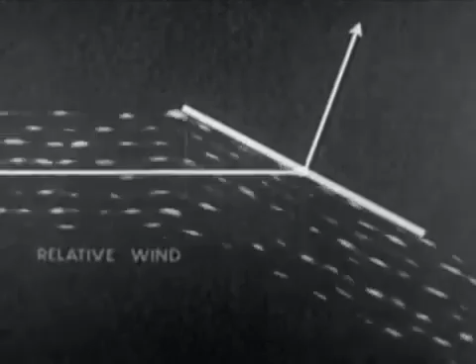An air stream flowing past a flat plate exerts upon it a force whose direction depends upon the angle between the plane of the plate and the direction of airflow. This force may be analyzed into component forces, which are called lift and drag.

Lift acts at right angles to the relative wind, and drag acts parallel to the relative wind. If the plate is held in a horizontal airstream in this manner, lift is opposed by the weight of the plate, and drag is opposed by the tension on the cord.

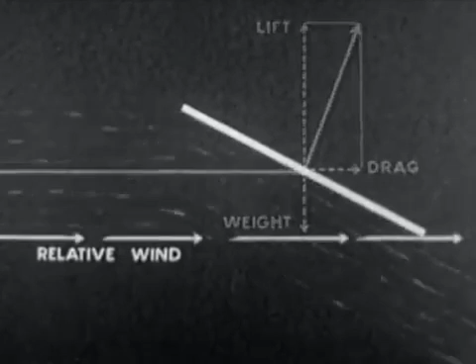The acute angle between the relative wind and the face of the plate is called the angle of attack. This angle may have any value from 0 to 90 degrees. It may be either positive or negative.

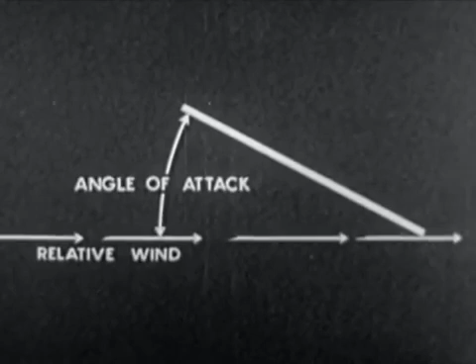An airfoil is any surface designed to be projected through the air in order to produce a useful dynamic reaction. Airfoils which have been studied and used vary widely in form. This is probably the most common type of airfoil section.

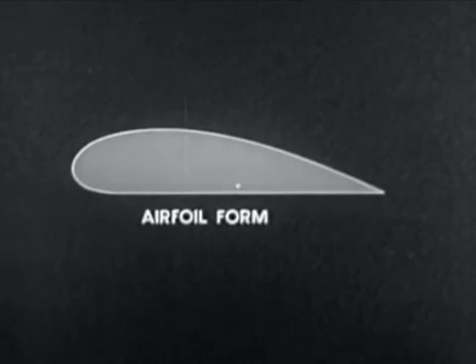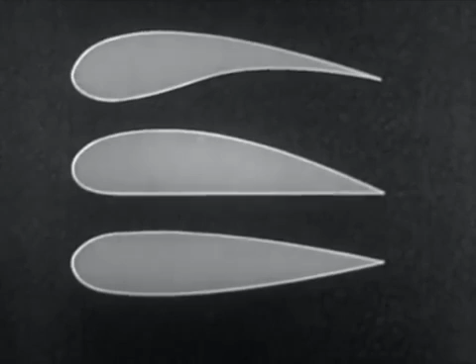Others are convex on their upper surface and concave on the lower, while still others are convex on both surfaces. Relative thickness and curvature of airfoils vary considerably.

In general, a line through an airfoil's leading and trailing edges is known as its chord. This is the case with an airfoil having a symmetrical double convex camber.

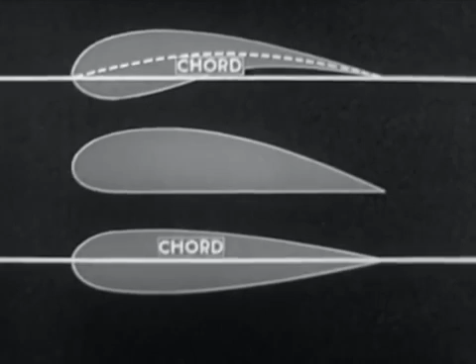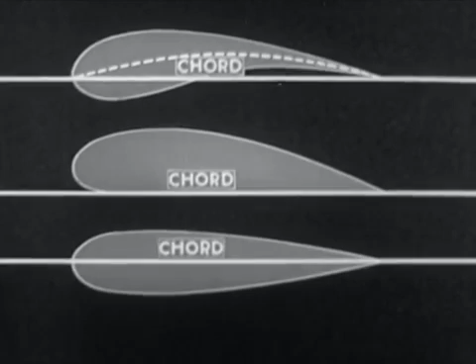In an airfoil which is convex on its upper surface and concave below, the chord corresponds to the chord of the median camber. In other airfoils, it is the line of a straight edge brought into contact with the lower surface at 2 points.

The acute angle between the chord of an airfoil and the relative wind is known as the angle of attack of the airfoil.

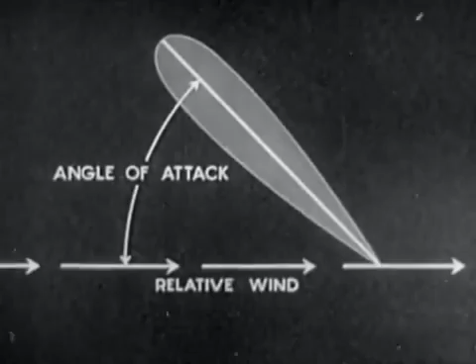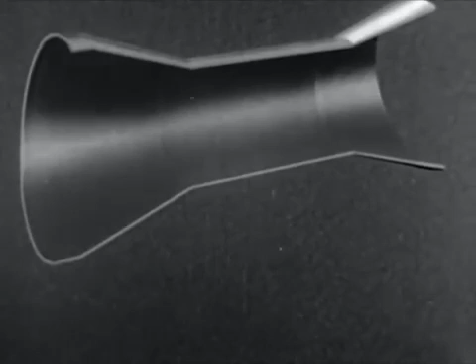A wind tunnel is a device for testing reactions on airfoils and other aerodynamic shapes. It usually consists of a large tube with a constricted throat. A propeller produces airflow, and a honeycomb arrangement is placed at one end to ensure straight airflow.

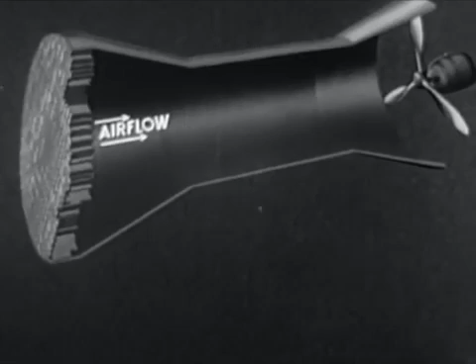When lift and drag of an airfoil are to be measured, the model is placed in the chamber and supported by wires. One wire runs from the model through the top of the tunnel to a balance arm which is weighted so as to maintain tension and compensate for other forces.

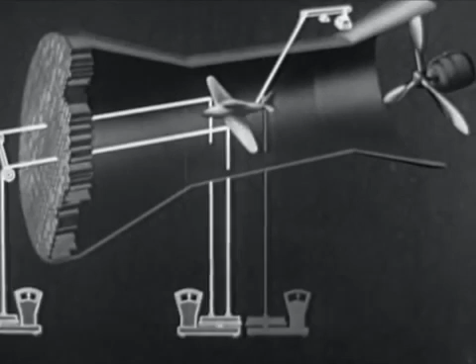From the leading edge of each wing, a wire runs forward in the direction of flight, over pulleys, and down to a bar on a platform type of scale. A second pair of wires runs vertically downward from the wings to another scale. Finally, a wire extends from the tail down to a third scale. In this way, the model is suspended so that the various forces exerted upon it may be measured.

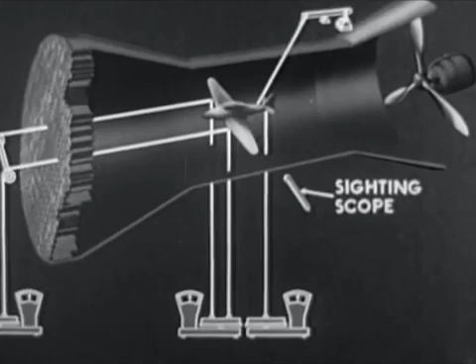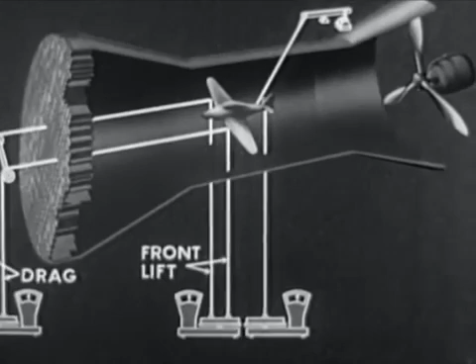The position of the model is observed through sighting scopes. With the air flowing at the desired velocity, drag force is exerted upon these wires. Front lift is measured as the actual lifting force upon these wires. Rear lift as the force upon this wire. Total lift is the sum of front and rear lift.

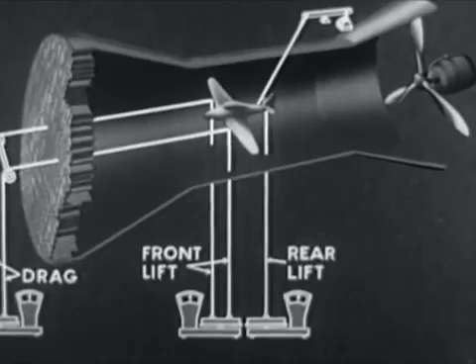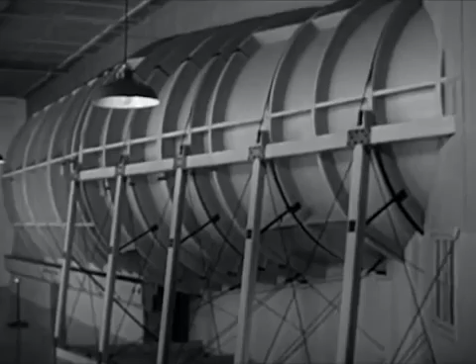Four electric motors of 400 horsepower each furnish power to turn the fan. Two of the motors are shown here. There are two others inside the tunnel.

The fans are 12 feet in diameter and have 12 blades. When driven at a speed of 700 RPM, they produce an airspeed of approximately 200 miles an hour in the tunnel.

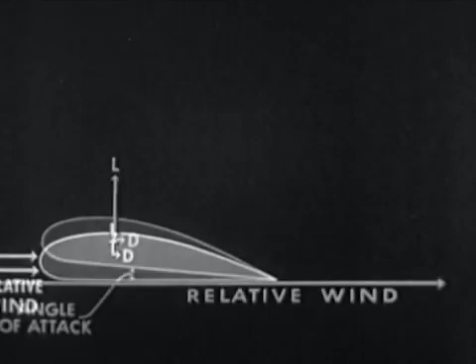Wind tunnel tests show how lift and drag vary with the angle of attack of an airfoil. In general, as the angle of attack increases, lift and drag increase up to a point where lift decreases abruptly and drag becomes the principal component.

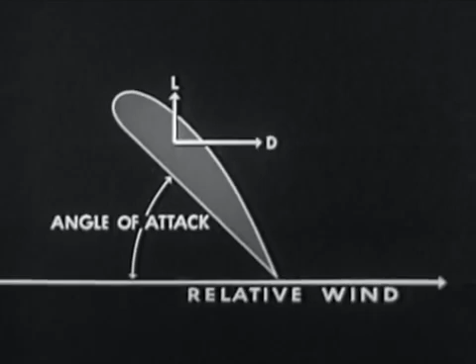This is known as the stalling angle. From this angle to 90 degrees, drag continues to increase while lift falls off.

At 90 degrees, the airfoil acts like a flat plate. It has maximum drag and negligible lift.

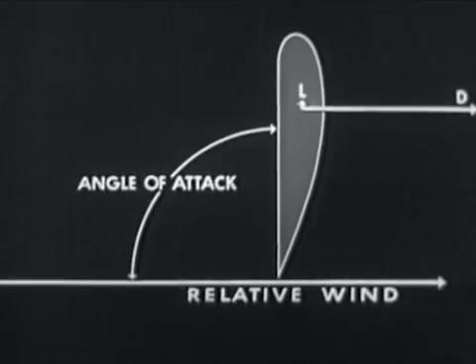Wind tunnel tests have also proven that for any given airfoil, lift and drag vary directly with the area of the wing. If the area is doubled, lift and drag are also doubled.

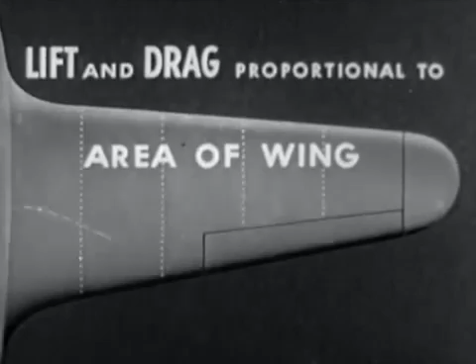Lift and drag vary directly as the square of the velocity of the relative wind. If wind velocity is doubled, lift and drag are multiplied by 4.

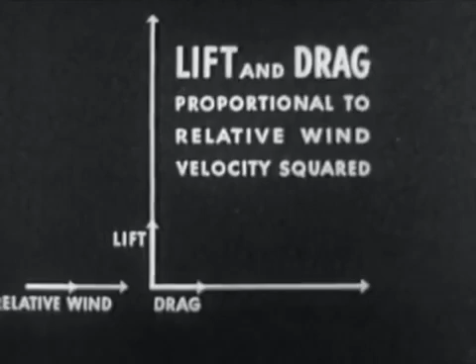Lift and drag are directly proportional to the density of the air passing over the airfoil. If air density is doubled, lift and drag are also doubled in value.

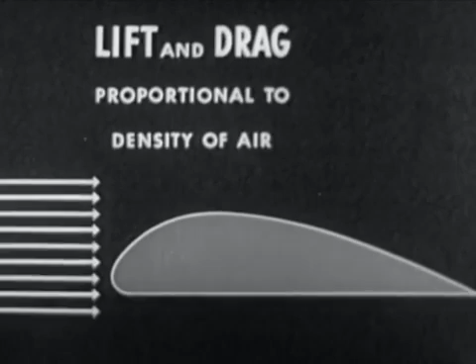Expressed as an equation, the lift is equal to a coefficient which is determined by the angle of attack and shape of the airfoil, multiplied by the density of the air, multiplied by the area of the wing, multiplied by the velocity of the wind squared.

Drag equals the coefficient, which is determined by the angle of attack and shape of the airfoil, multiplied by the density of the air, multiplied by the area of the wing, multiplied by the velocity of the wind squared.

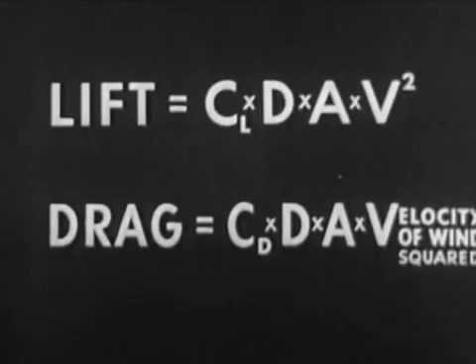When an airplane is flying horizontally at a constant velocity, the forces acting upon it are in equilibrium. The retarding force, or drag, equals the propelling force, or thrust. The lift must equal the total weight of the airplane.

Therefore, the lift and drag equations serve to determine how much weight an airfoil will lift under certain conditions and how much thrust horsepower is required to overcome the total drag of the airplane.

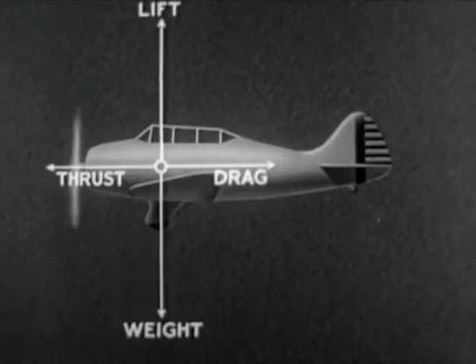The air pressure at various points on an airfoil is measured in order to determine the airfoil's efficiency or its suitability for a given purpose.

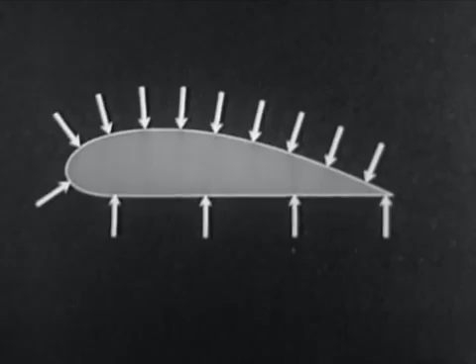The measurements are made by building into a model airfoil small copper tubes which are sealed flush with the surface of the model.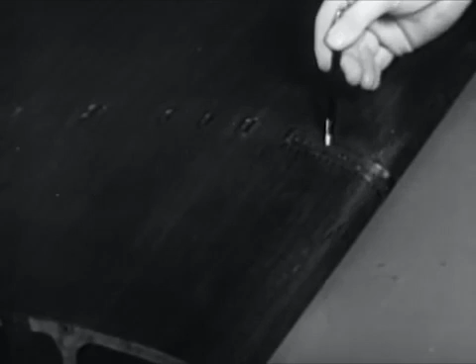These tubes extend from the model to a pressure measuring device outside the tunnel. The device is called a manometer. This figure illustrates its principle of operation.

The liquid in both the tube and the reservoir will be at the same level as long as the pressure in both tube and reservoir are equal.

If by any means, such as this plunger, for example, the pressure in the tube is increased, the liquid is forced into the reservoir, lowering the level in the tube.

If pressure in the tube is decreased, the liquid rises above the level of the reservoir.

In a device such as this, if the liquid in the tube is subjected to varying pressures, the level will rise above or fall below the level of the liquid in the reservoir as the pressure is decreased or increased. Reading of liquid levels provides an accurate means of determining pressure difference.

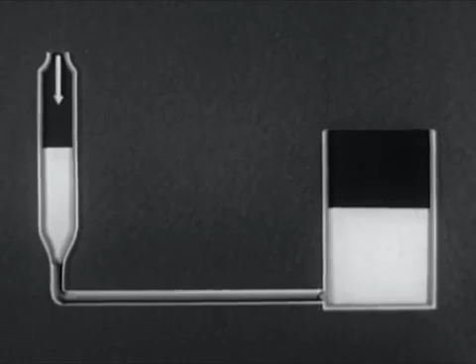Additional tubes may be added, each connected to a different value of pressure, and each will indicate that pressure accurately, regardless of pressures in the other tube.

Operating on these principles, this bank of manometer tubes is used to determine pressures on an airfoil. Because all tubes are at the same pressure, being exposed to the atmosphere, the levels in the tubes are equal.

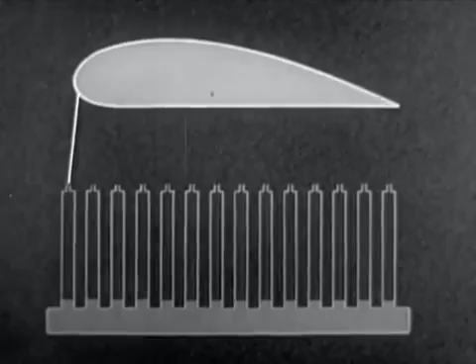For test purposes, each manometer tube is connected to a different point on the surface of the airfoil. The majority of these test points are located on the leading edge and upper surface. Relatively few are placed on the lower surface.

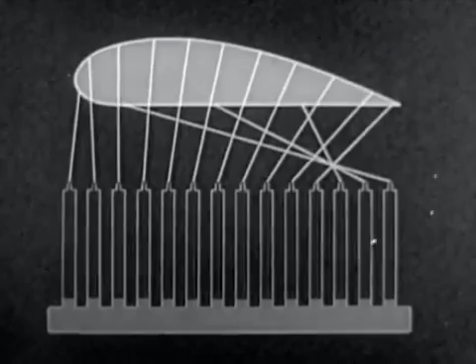Of course, this is only a schematic representation of the connection. In actual practice, tubes run from the manometers through an opening and inside of the airfoil to the test point.

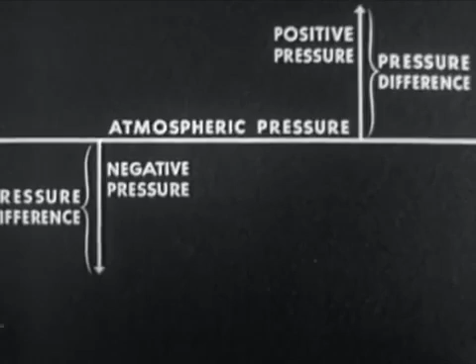Atmospheric pressure is usually taken as the reference level. Pressures above atmospheric are called positive. Those below atmospheric are called negative. Actually, these values are pressure differences with reference to the atmospheric pressure. With reference to absolute zero, all pressures are necessarily positive.

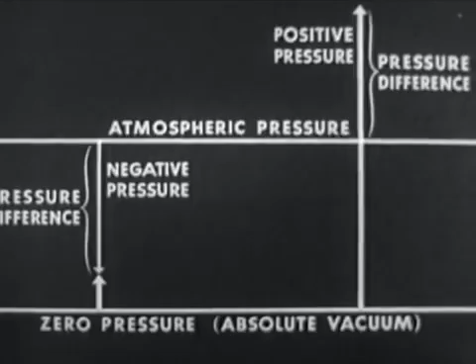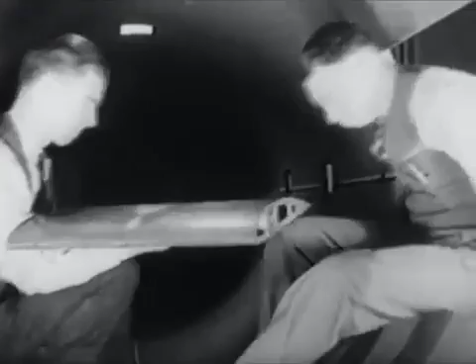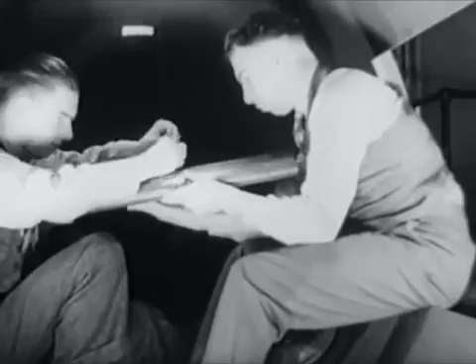The model airfoil is placed in the test section of the wind tunnel. It is supported by wires which will transmit its lift and drag forces to the scale.

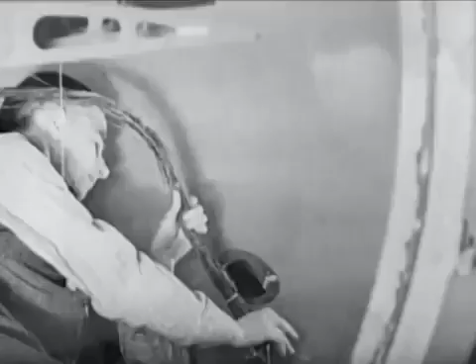Tubes which connect to the test points are passed through an opening in the tunnel wall and connected to the manometer bank. The manometers, being at equal pressures, are at the same level and are connected to the airfoil. Thus, from each manometer tube, there is a direct connection to a definite point on the surface of the model airfoil.

All is now ready for the test, and the engineers leave the tunnel to take up positions where they can observe and measure reactions upon the airfoil. The motors which drive the fans are started.

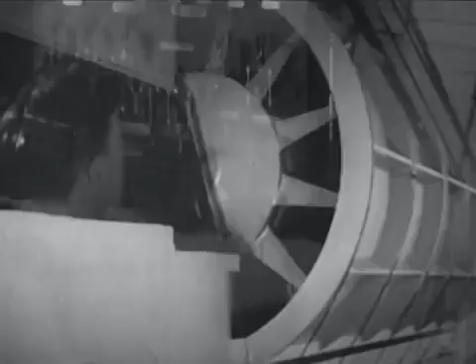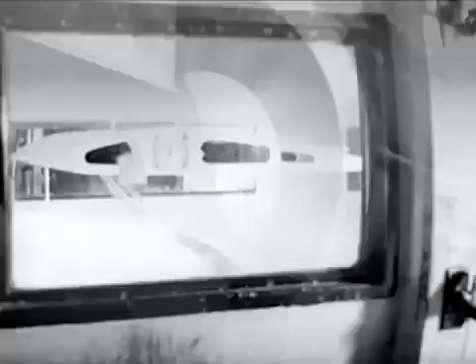In the tunnel, the model airfoil is subjected to the same conditions which it would encounter in actual flight through a medium of the same density, and pressures along the surfaces are at such values as would be met under flying conditions. The manometer tubes tell the story.

Levels fluctuate slightly as minute variations in airspeed or density occur, but the ratios are constant, and the position of the liquid in the tube shows both positive and negative values for the airfoil. The tubes are photographed to assure simultaneous readings of all tubes, and the photograph is used by engineers to plot the pressure curve.

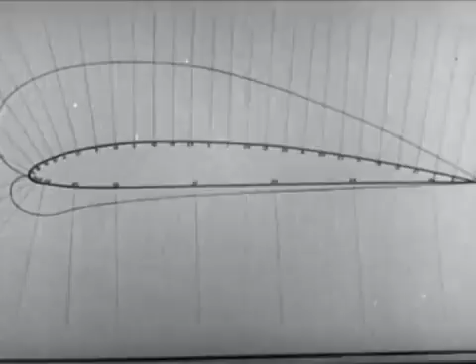In this manner, a diagram is constructed showing the nature and distribution of pressures over both surfaces of the wing section at varying angles of attack.

Positive pressures are shown in black, negative in gray. At 0 degrees, there is a small bulb of positive pressure directly upon the leading edge of the wing. Another area of positive pressure encloses the trailing edge and extends forward about 1/4 chord length along the lower surface. Elsewhere, the pressures are negative.

As the angle of attack is increased, the positive pressure bulb moves lower down on the leading edge and back along the lower surface of the wing, enclosing the trailing edge. The negative pressure distribution remains fundamentally unchanged, although its values are greatly increased. This diagram indicates that the wing has begun to exert a considerable lift.

Increasing the angle of attack still further alters pressure distribution very little, although there is a marked change in values, particularly along the upper surface, where negative pressures are now exerting a powerful lift force.

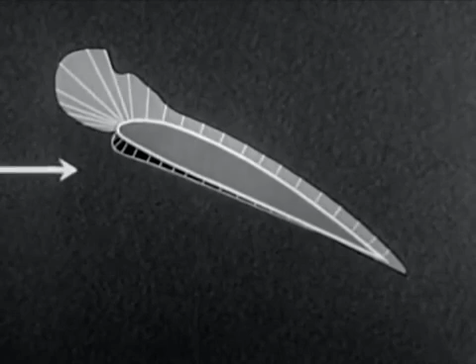Increased angle of attack brings no important change in positive pressure value or distribution, but the negative pressure area is tending to equalize in value over the entire upper surface of the wing.

At this angle of attack, the forward protuberance disappears completely, and an area of nearly equal negative pressure blankets the entire upper surface of the wing. Positive pressure areas still show no important change.

Another increase in the angle of attack merely results in increased value, distribution remaining almost the same as before.

At this final angle, pressures have reached still greater values without any appreciable change in distribution. It might appear from this diagram that at this angle of attack, the uniform pressure distribution over the upper wing surface would be desirable.

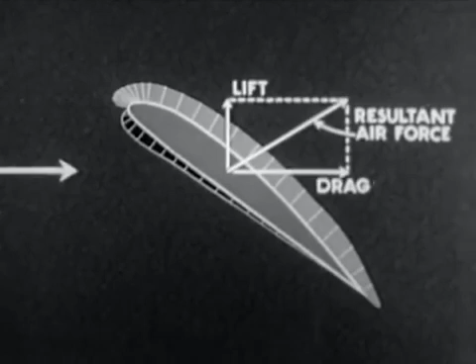However, above the stalling angle, the resultant air force acts in such a direction that the drag is its largest component.

An airfoil at rest in still air is at atmospheric pressure over its entire surface. It has been shown that airfoils derive their lift from the pressure differences acting upon their surfaces, the negative pressure difference upon the upper surface at normal angles of attack being the major component of the lift force.

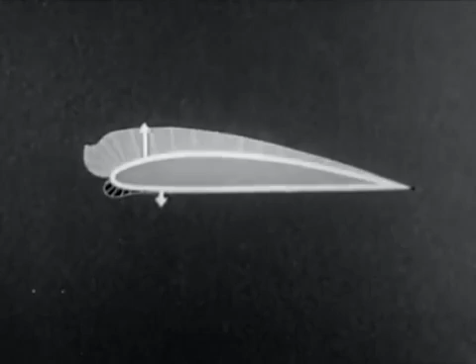Now let us see what happens to pressure values and distribution at negative angles of attack.

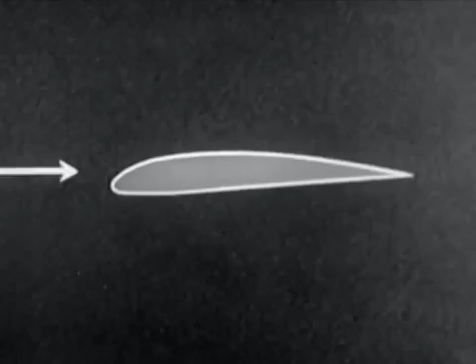From 0 degrees, the angle is decreased to a slight negative value. The positive pressure bulb on the leading edge is practically unchanged.

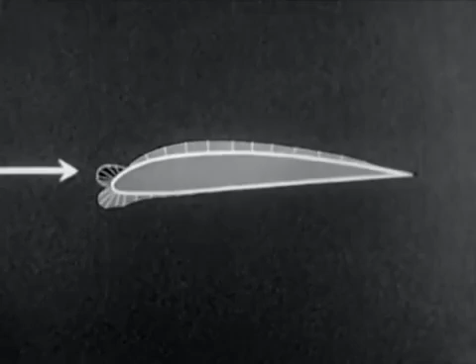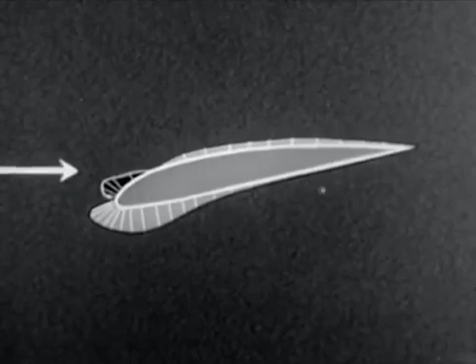The negative pressure on the upper surface of the wing shows little change. However, the negative pressures along the lower surface begin to increase at the leading edge. Further increases in this area, accompanied by very slight changes in the positive pressure bulb, are the only differences which are readily observable as the angle of attack is further decreased.

The angle of attack of an airfoil was shown to be the acute angle between the chord of the airfoil and the relative wind.

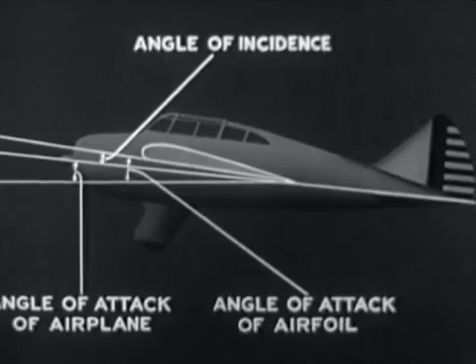The angle of attack of the airplane as a whole is the acute angle between the longitudinal axis of the airplane and the relative wind. The difference between these two angles is constant for any given airplane and is called the angle of incidence.

Although the angle of attack is constant for any given wind tunnel test, in actual flight, the angle of attack of the airfoil varies with changing attitude and speed of the airplane.

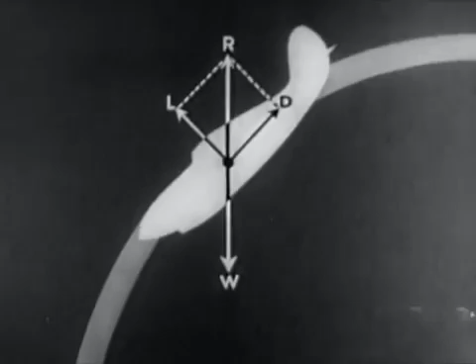Consider the case of an airplane flying horizontally at a small positive angle of attack. As the controls are set to put the airplane into a dive, the angle of attack decreases and the speed increases. Lift decreases, since in this attitude the weight of the airplane is opposed by the resultant of lift and drag.

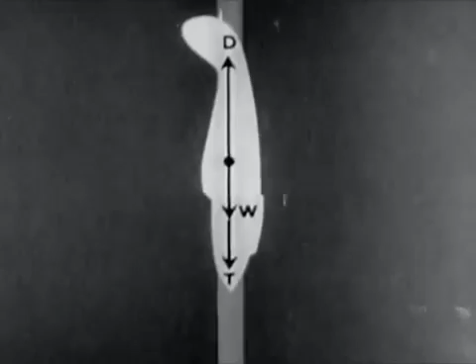As the flight approaches the vertical, speed increases until the terminal velocity is reached in the so-called vertical dive. In this condition, lift is zero, and the weight of the airplane plus its thrust are opposed by drag alone.

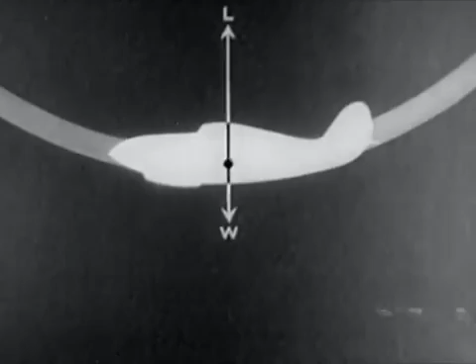In pulling out of the dive, the angle of attack must be increased slowly. During this maneuver, lift may attain several times the value of the weight. This increase in lift produces acceleration, which in turn produces a curved flight path.